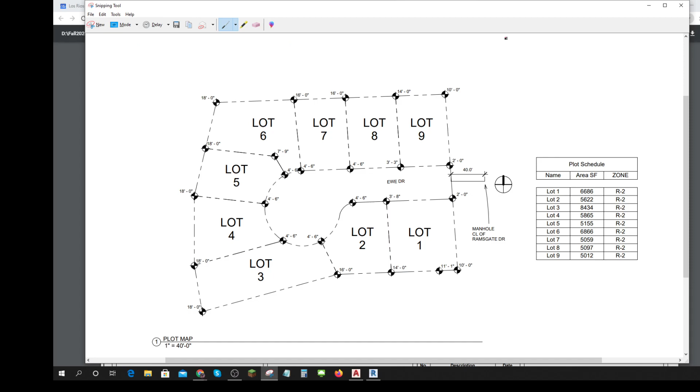So now I've got this cool drawing that I can scribble on and you can see stuff. So what you see here is this is from DT 302, right? Most of you have drawn this. Many of you have drawn this. If you haven't, I've given you an AutoCAD template of the lot lines.

But this is very typical of a little development drawing. So there's some sort of a piece of property that's being subdivided into lots 1, 2, 3, 4, 5, 6, 7, 8, 9. What you don't have on this drawing is the text. If you have a version with all of the lot dimensions, you can use it. You can get it if you use Revit, it just pops out, or you can use your property boxes to get those dimensions.

But most of all, you can see that all the corners of each lot have an elevation. Sometimes we think of these lots as being sort of flat, but this thing, you can see, here's the high point, and it slopes down this way. So we know unless we grade this, the water is all going to go this way, it's going to continue to go this way. This one's going to go more straight this way. This one's going to go this way and here, this one all coming toward the middle, which means your storm drain is all going to be in here. None of this lot is going to go into our neighbors.

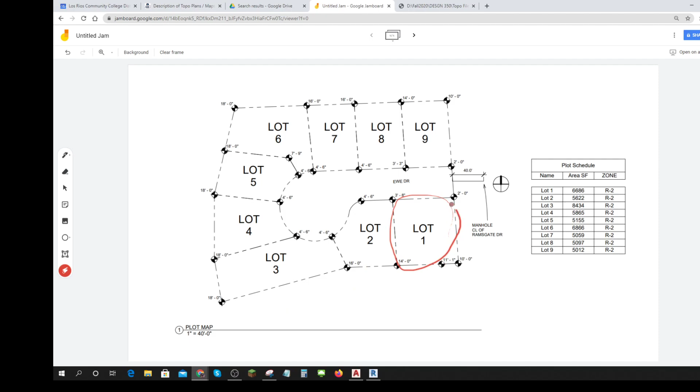So there's this one. Now Benjamin says corner lots are often larger. There's a few reasons for that. You'll look in the standards, corner lots have a larger offset in both directions, and they usually have a larger minimum lot size. So if all these other lots had been made at the minimum, these corner lots would automatically be larger because corner lots are, instead of like a minimum 65 feet, they're a minimum 75 feet.

And that's because there's an additional maximum offset, like on the sides. Usually there's an offset of 4 feet and 4 feet so that you have the fire lane of 8 feet. Now, people often put air conditioners in the way. You're not supposed to, and the planning commissions will look at that to make sure that you always have fire access to the back.

Lots and lots of rules to go into, which is why I want you guys good at reading codes. There's no way I can go over the codes, so I sort of throw out little bits and hope that you'll go, okay, oh, there's a fire code, oh my gosh, I got to read the fire code before I get work somewhere. And I got to read this code and that code, or know where this code and that code is.

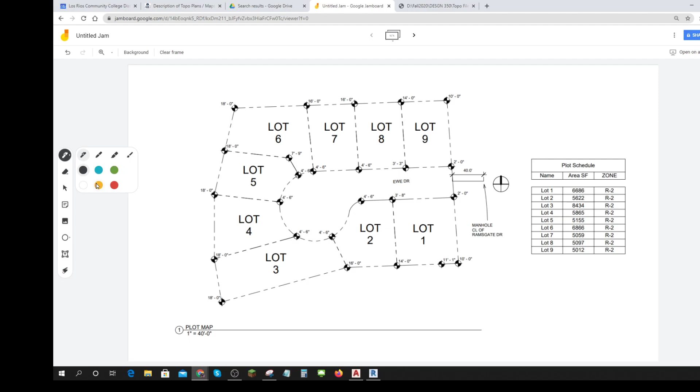So there's one that's of interest. Now notice that these are written pretty large. They need to be easily identified. So like if these are 3/32 maybe, these will be a 1/4 inch. Because that's really what you're just trying to do—you're just trying to identify each lot.

And then over here, normally I get rid of this line or this gap. Usually there's a gap. You'll notice that I've got my scale on there. Okay, any questions about this one?

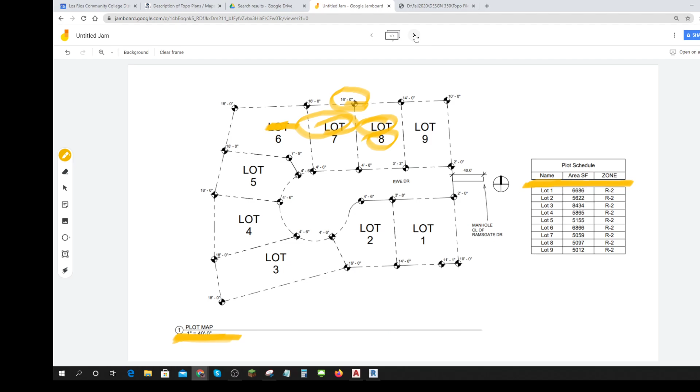And I'll go on to the next one. We'll talk about the calculations a little bit. Okay, let me make another Jamboard then. Of these, this is your favorite stuff. I know you guys all love to calculate. I love to calculate, actually.

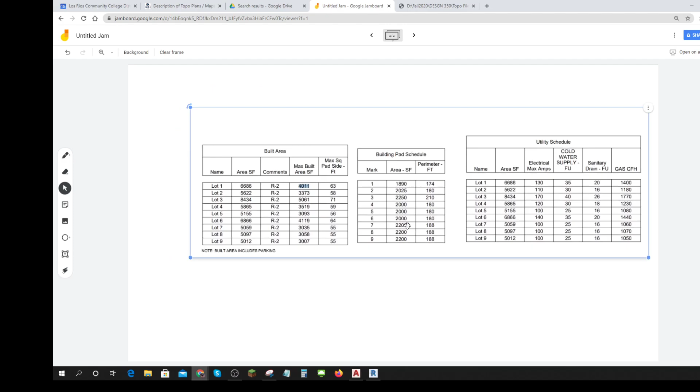And I don't usually make these things available to you, but if you want to, I can make these Jamboards available. What is this? This is 350 on 915.

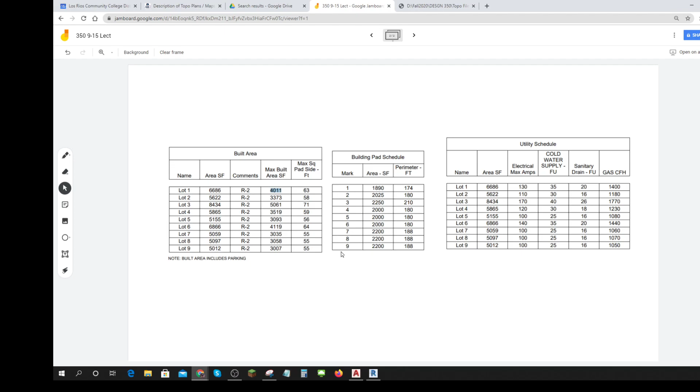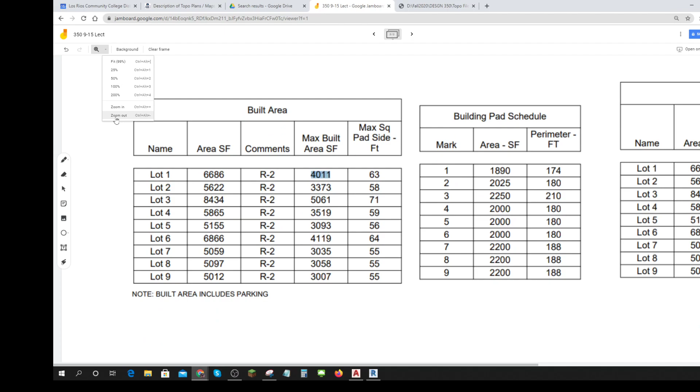Okay, so I've got a whole bunch of interesting calculations here. So here's my first set of calculations. And so I reproduced this thing, and then I did some calculations.

Now, Revit allows me to do these calculations on my own. Inside of Revit, you can actually set up your schedule with calculated fields, and I'm going to show you how to do that in the lab.

So Renolfo says, can you make your own north symbol? Yes, you are allowed to make your own north symbol. And sorry about the squeaky chair that's coming through everything, but I needed my comfy chair today.

And so there's built area. Built area is really important. Sometimes they call it FAR, SAR, BA, BAR - built area rentable.

And this is ground area, the area of the ground. Notice it includes parking. So if I've got a 20 by 30 driveway, that's 20 times 30, somewhere around 600 square feet taken up, and then probably 400 square feet.

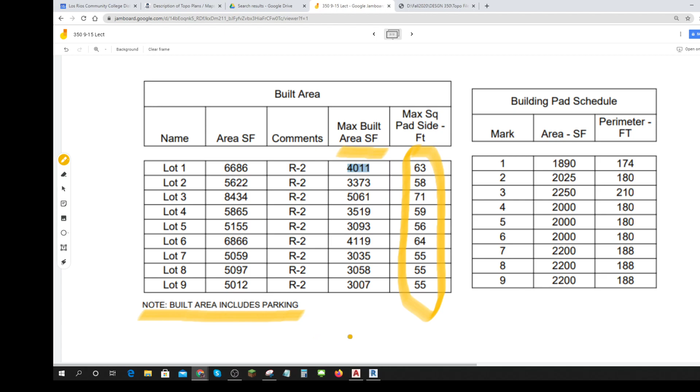Okay, so this one's a key thing, and you should be able to calculate this. Now I'm going to let you either look this up - I looked it up in the code, in that code I gave you. I just went to square feet, did Control F, and went through the 515 per acre or per square foot things, and I found it. Or you can just do a calculation.

These all should be about the same ratio. How do you do that? Ratios are 'gazintas' - this number goes into that. So if I want to find what this number ought to be, I do a gazinta. 4011 gazinta 6686 - oh, that's pretty close to 60%.

Let's try this next one. Where's my clear? 3519 divided by 5865 - oh, pretty close to 0.6. Let's try the next one. 3035 - so you can get a lot of information just by reading the numbers. 0.6.

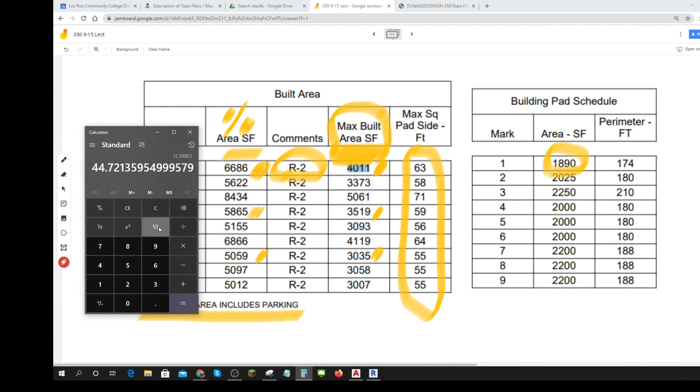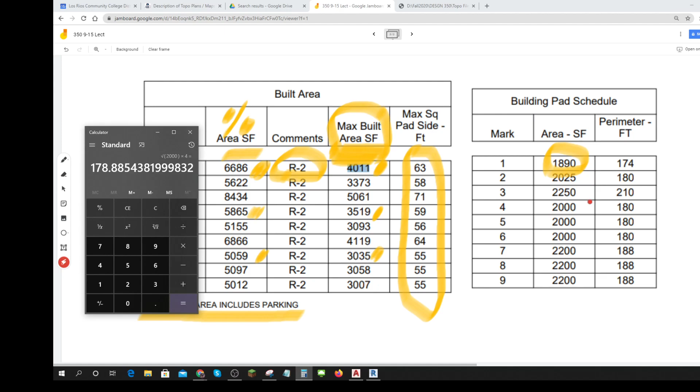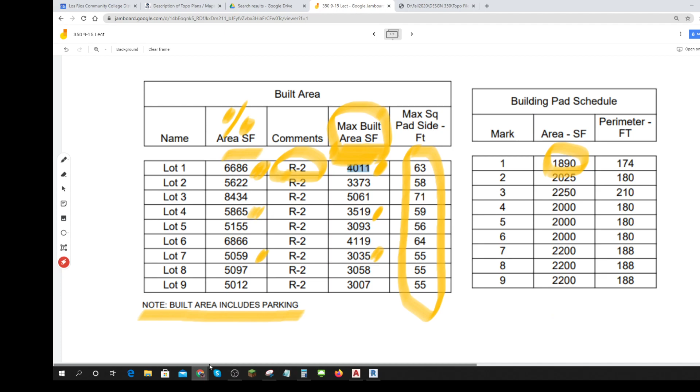That's what I did. Right, so I took this as a square, and then 4 times each side. Okay? So this is just arithmetic. It's not even math, it's just arithmetic. Find how big, how do you make that into a square? It's the square root. Square root, very quick and easy. What's the perimeter of a square? It's 4 times the side.

So that's your building pad schedule. So this is the max. And that's the building pad that I decided to put on each one.

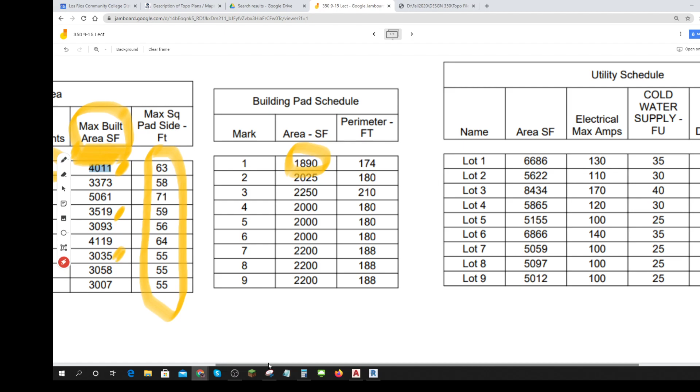Now here comes the key part. Once I've got that, now we're really into the land planning, the civil development portion of it. That's all cool. How do I bring my utilities to it? Remember, in the utility plan, there was gas, there was sanitary drain, there was cold water, there was some electricity. Well, when you drive by a small development, you'll see, I mean, they have to get that all under the road before they start grading each site and building the pad, and you'll see them sticking up out of the ground, pipes and stuff like that. So how do you know how much to put underground?

Well, here's my electrical amps. So let's see if there's some sort of basic calculation I can make. If I come over here, there's a kilovolt amps per square foot. Multiply it by the whole number of square feet and all sorts of stuff. So I did some calculation around that, and I actually used eQuest. For those of you who have done DT310, I used eQuest, and I think I came up with a ratio.

So here's my square foot of my place. I don't know which square foot I used, but I think it was this one. So let's go 130 amps divided by 6686, 0.02. So if I multiply this by 0.02, let's see if they're all sort of like that. 8434... 170... 8434 times 0.02. So if you take this square feet times 0.02, you get that number.

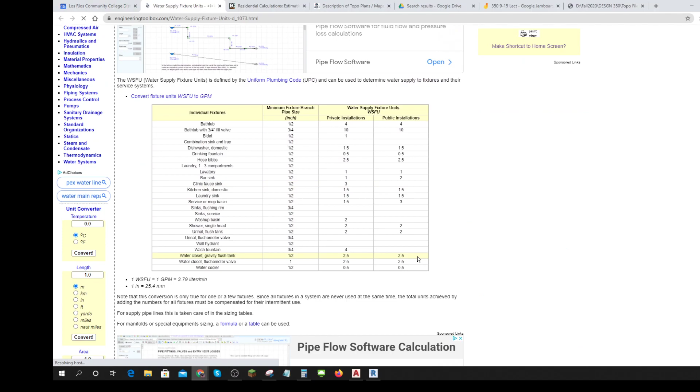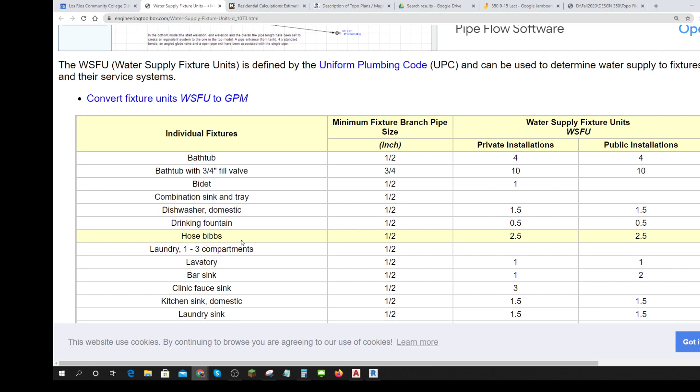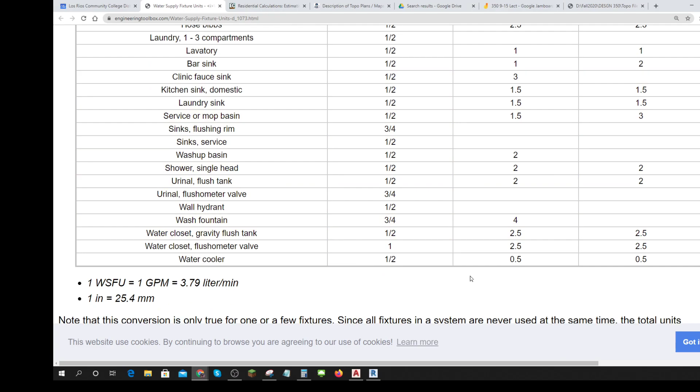A bathtub is likely to use 4 fixture units. A dishwasher, 1.5. A hose bib, 2.5. A laundry, it doesn't say, that's interesting. A lavatory, one. So you can sort of kind of figure out about how much you're going to use in a typical building.

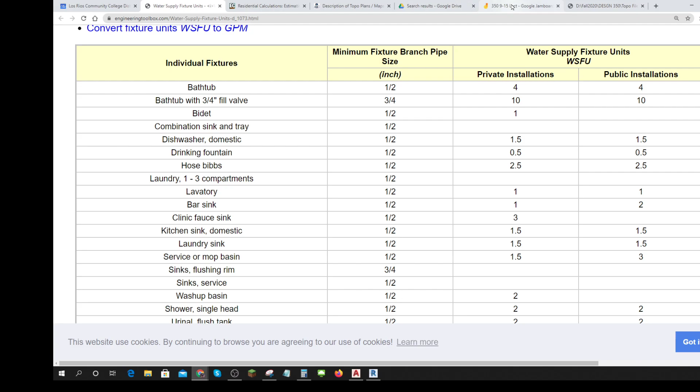So you've got a link to that. So again, you want to find out how much water is going to be used, and you add up all these fixture units, and it tells you how big the pipe that's going down the middle of the street needs to be able to handle that much water all running at once. Your standard is based on everything being open fully at once.

Now, there are a few things you can do that says it's only likely that you're going to have 80% of the bathrooms flush at exactly the same time. Well, I did a job at a prison in Tennessee where the prisoners figured that out, and they all flushed at the same time, and they crashed their system, blamed it on my valve that started to water hammer. I had to go there, and it was one of the worst experiences of my life.

Don't go to jail, just don't go to jail. This was a medium penitentiary, and the guards, the guys had to clear the block so I could go into. They all had to stand far enough apart so their fingertips would barely touch when they were standing with their arms out. They actually had to stand there the whole time with their arms straight out while I was in that building. And every now and then I'd hear the shotgun going off, which meant somebody had dropped their arms.

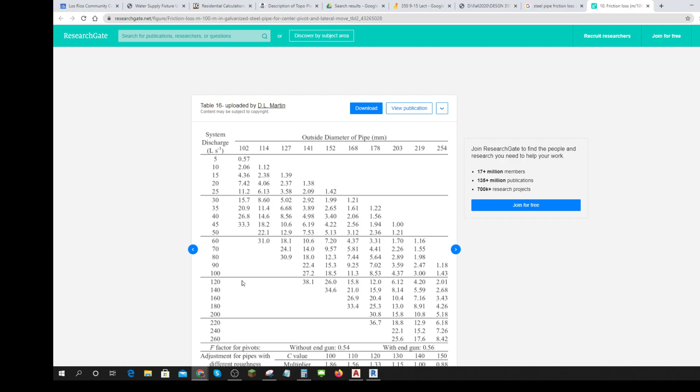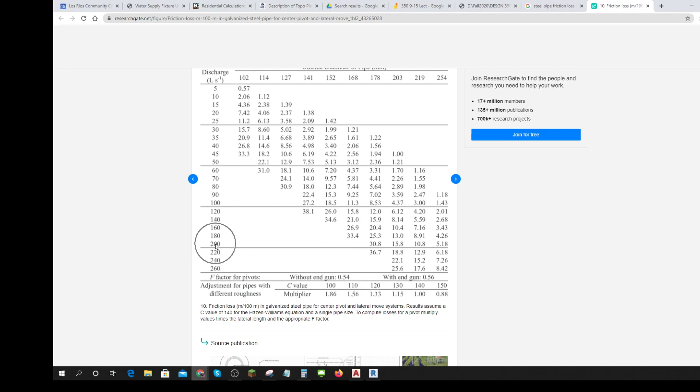So here's, for instance, a pipe friction loss chart. Okay, well this one happens to be in millimeters. But let's say you want 200 liters per second — then you need at least a 30.8, or a 30.8 millimeter pipe. You could go down to a 5.18.

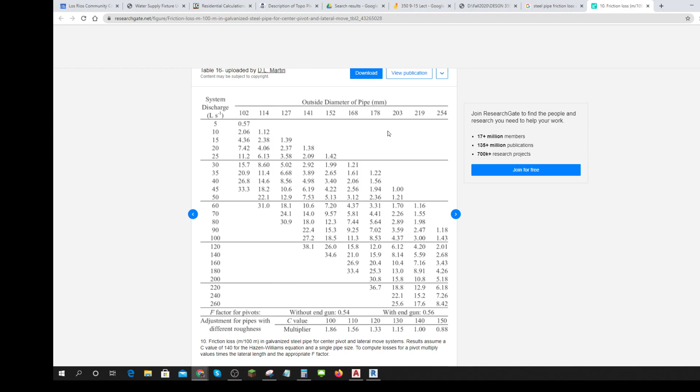Oh no, this is your velocity. So you would want a 178 millimeter pipe, anywhere up to a 254, and this is your friction loss. So that has a lot of friction loss in a small pipe compared to a big pipe. Yeah, they have tables about how big a pipe should be compared to how much water is going through it. Let's see if I can find one. You probably want that 254 pipe so you don't have that friction loss. Yeah, although that's more expensive, right?

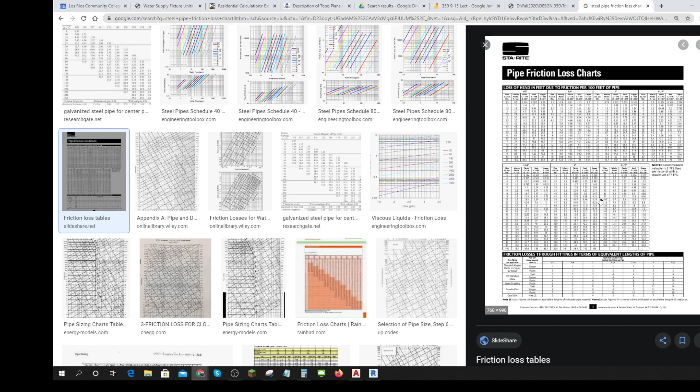So here's like gallons per minute, 10 gallons per minute in a 1 1/4 pipe. Then depending on the type of fitting, you're going to lose this much friction. So they have tables about all that. And that's what we do in DT 330.

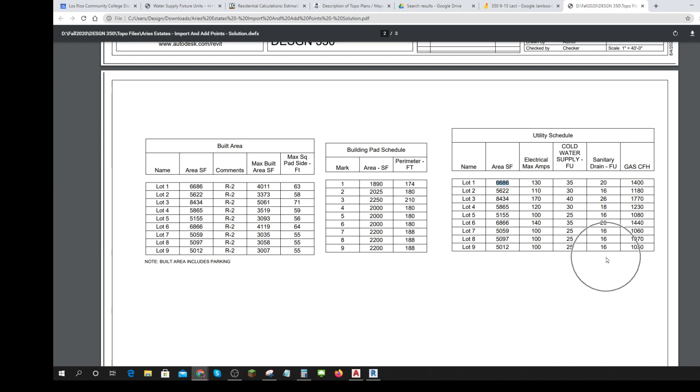Your job in this class is to prepare the information based on your square feet so that somebody can start doing the detailed design. So on this one, in the middle of winter, when you've got your furnace running and everybody's cranking their hot water in their shower, and you've got, you're boiling up your tea and this and that, and so everything's running, you've got that going. You could be pulling that much gas, and you need a certain size pipe to get that gas.

Now in California, they just raised the size of that gas line, by the way, out of the standard. They just raised the minimum. So if you put in a tankless water heater now, you're likely to have to replace your gas line too.

Okay, so does that help, Natalia? Yeah, did you have to replace your gas line, Laura? Yes, we did. We had it all done when we put our tankless in.

Okay, because it uses more quickly on demand than a hot water heater that just slowly, it has this big reservoir so it can heat it up slowly, so it can use the gas more slowly. Those tankless systems, whereas you're not losing energy all the time. Boy, when you need the energy, whap, you need a ton. So overall more efficient, but the energy flow rate is much higher.

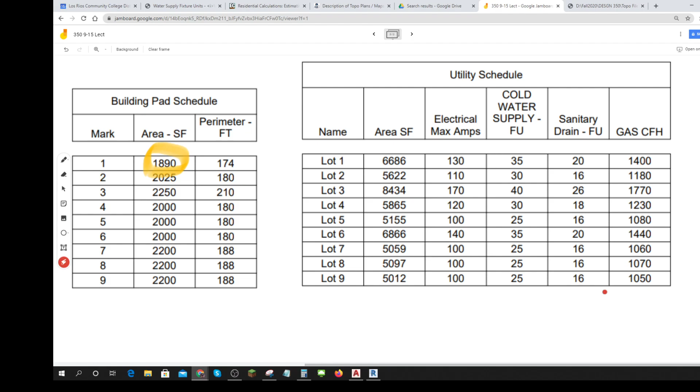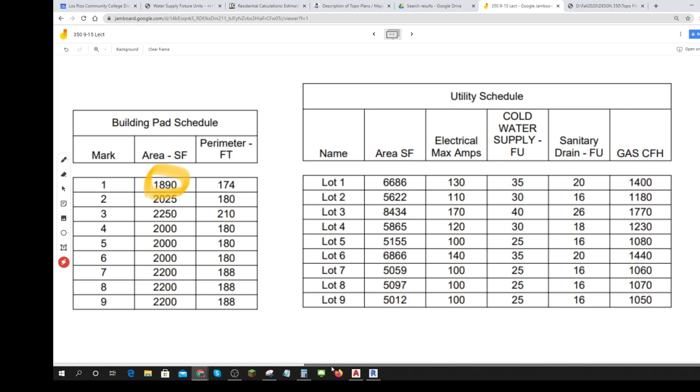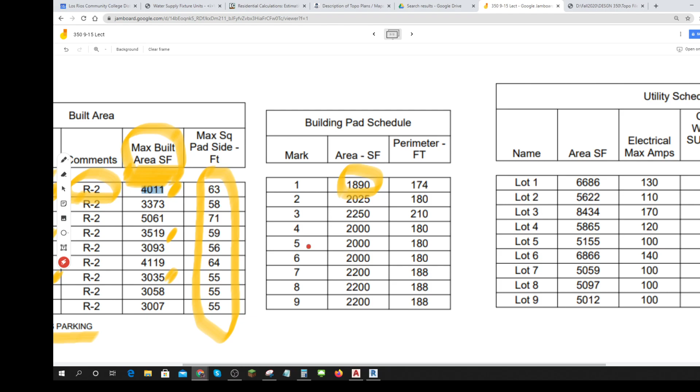Are we going to have a chance to practice on that? Where I'm still kind of lost. Yep, yep, you get to practice this in doing this. If you want to just copy this, well, then that's okay, but you won't get any benefit. But you need to make this. This is for you to actually draw.

So you want to draw this and then create these tables. And so I would do these either in Revit or in Excel. If you do it in AutoCAD, you're just going to put in an Excel spreadsheet, right? Or type in a table, but it's much easier to bring it in from a spreadsheet, which I can show you how to do. And I will show you how to do in just a moment.

Divide a number by the total and get it. Okay? And I can make some exercises up for that. Fortunately, you've got 2 weeks to do this and about 4 weeks till the midterm. So that's good.

So these are all good questions though, right? Now we're really into the guts of this thing. Any other questions about how to do this chart?